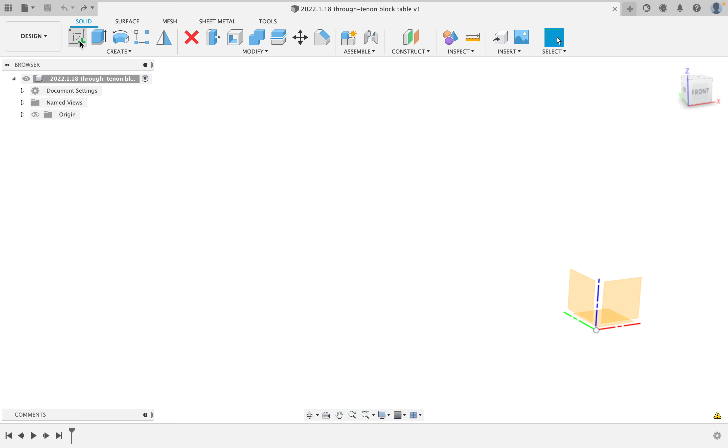This is the third installment in our Through-Tenon and curve-inspired classes for today, and we're going to get started by modeling this coffee table based on an idea that one of our subscribers and students talked to us about, and we are going to start modeling on the front.

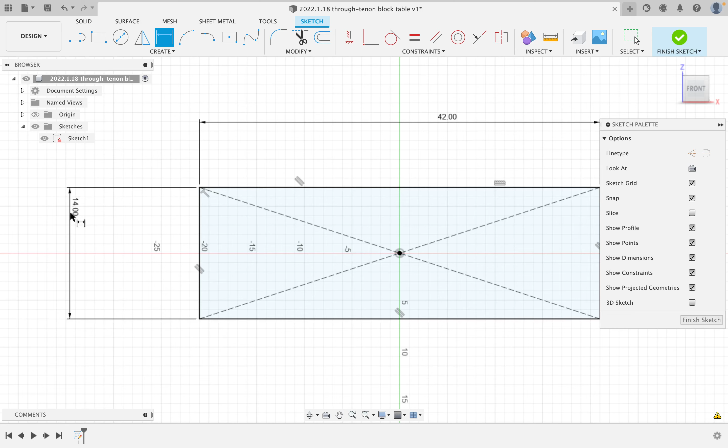We'll create a center point rectangle and just drag it out. Click on the dimension tool and set the top dimension to 42 inches. We're going to make the table exactly 14 inches tall, which gives us a nice dimension for a coffee table. If I double click on it and hit X, that changes these to guidelines, so they're not the actual outsides of the table itself.

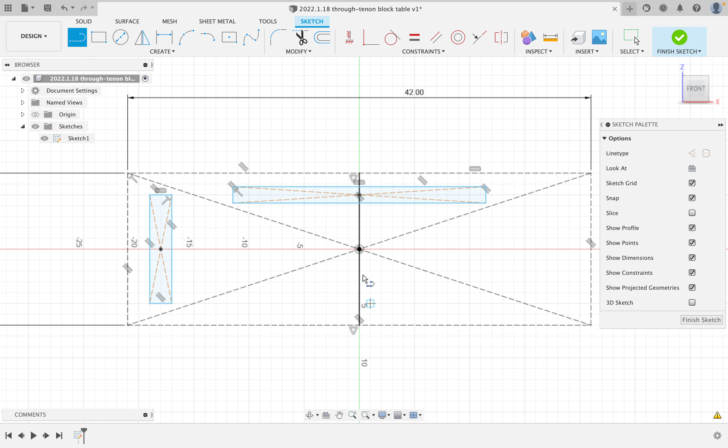I will click on the center point rectangle and create another rectangle, one for the legs and one for the top. We're going to model one leg, then copy it across after we do the joinery. Now we're going to need some mirroring lines, a mirror line through one and the other, so that we know we get things exactly in the center. I will change each of those to guidelines by hitting X.

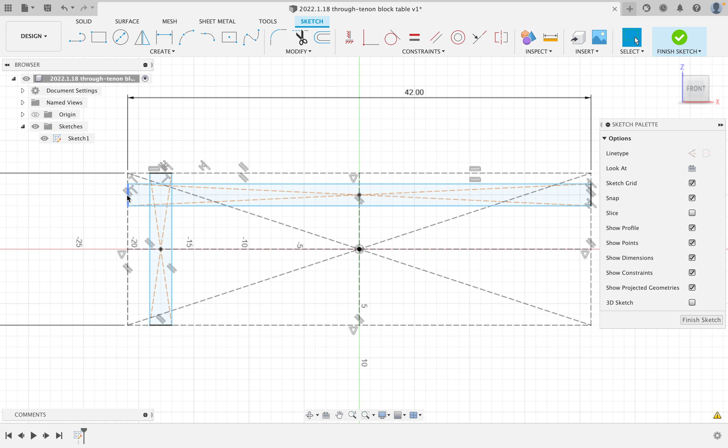And we are going to make these the exact width. I will click on this outside line and say it matches up with this outside line, and make the inside center on the center line here. I'm going to do the same thing with the inside center of that, and take the outside line and make it collinear with the outside. So now we have exactly those pieces.

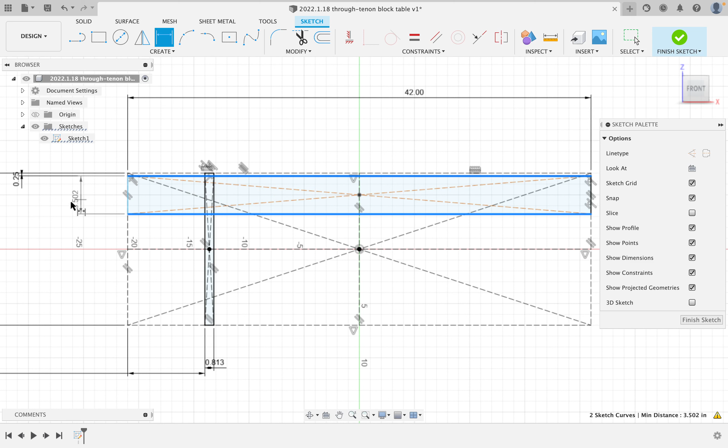The only thing I need to do now is tell it how far in and how far over each piece is going to be. So I will dimension from the top that it is going to be exactly 1/4 of an inch down. I'm going to tell it that the inside leg is going to be 7 inches in. I will tell it that the leg is going to be 13/16, and that the top is going to be 15/16. I think that's going to work out quite nicely.

No, we'll make them equal. We'll make them equal, and it will make our modeling a bit simpler. You can always change them back after if you like, but I think it'll make it easier to understand.

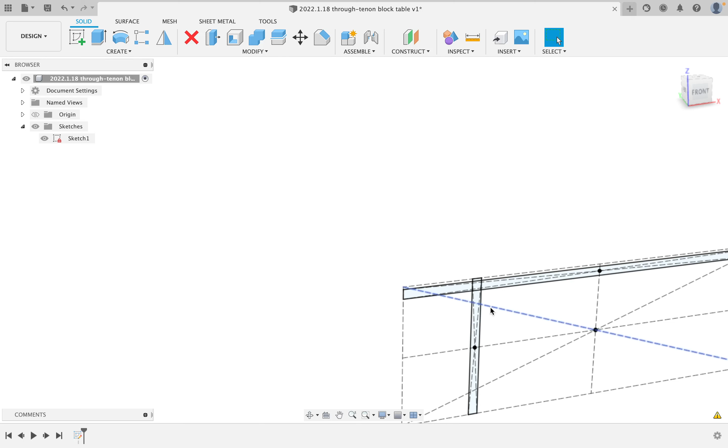Now, what I'm going to do is say Finish Sketch, and I am going to extrude the top. Pick the 3 pieces of the top, say New Component. I'm going to make it symmetrical, and the top is going to be 14 inches wide, so that's 7 inches in each direction, and hit OK.

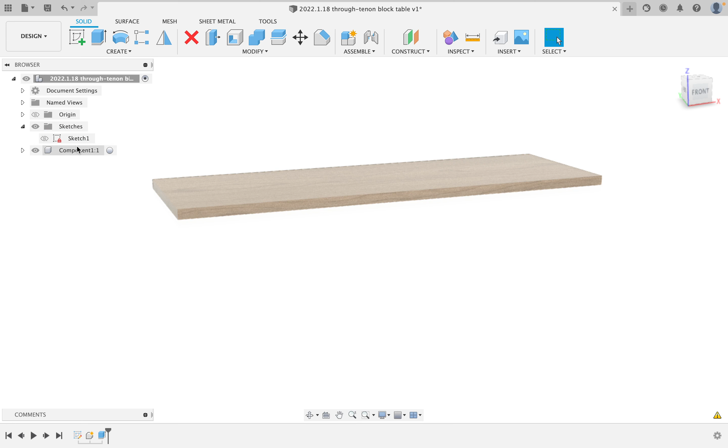To avoid any confusion, we'll rename it to be Top, turn our sketch back on, hide the top, and we're going to make our leg. We'll pick the 3 pieces of our leg, say New Component.

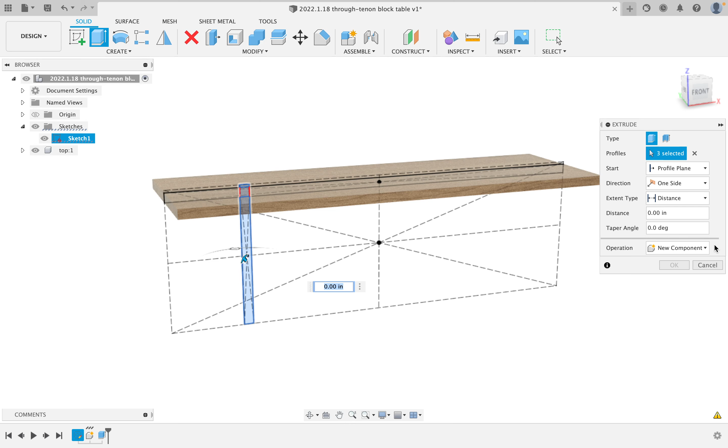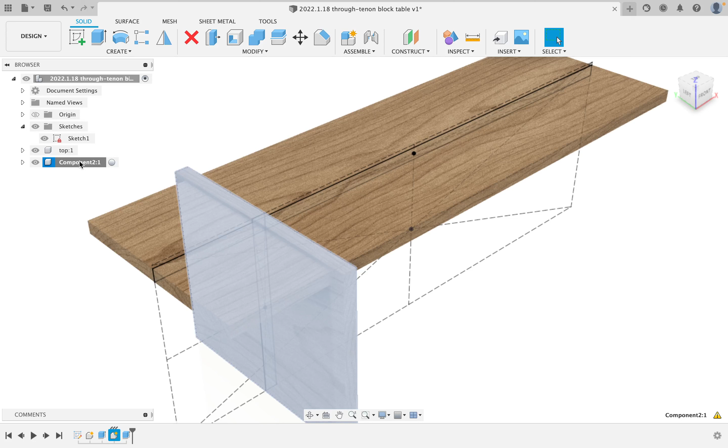We are going to actually make this leg wider than our top. So we're going to start from one side, go to the other side by selecting To Object and picking it, but we're going to make it 1 inch wider by changing our offsets to be 1 inch. Our new component, hit OK, and we will rename that to be legs.

When we turn off our sketch, we now see that we have one piece going directly through the other piece. Now, I think that's an interesting look, and we could actually just cut a hole, and that would be a neat way of mounting the table. But we're going to make something that is a little more intricate and involved here today.

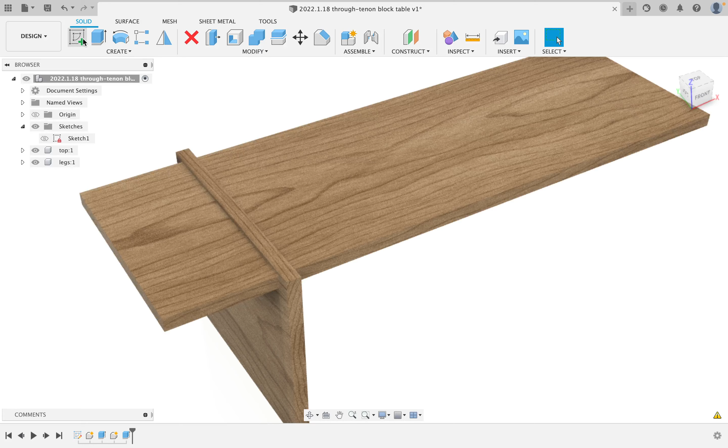So what I'm going to do is cut out some tenons. I will click, and I will start modeling on the top of our leg. Now, I want these tenons to start in the center, and that means I need to find the center line. So I will draw a line from the top to the bottom.

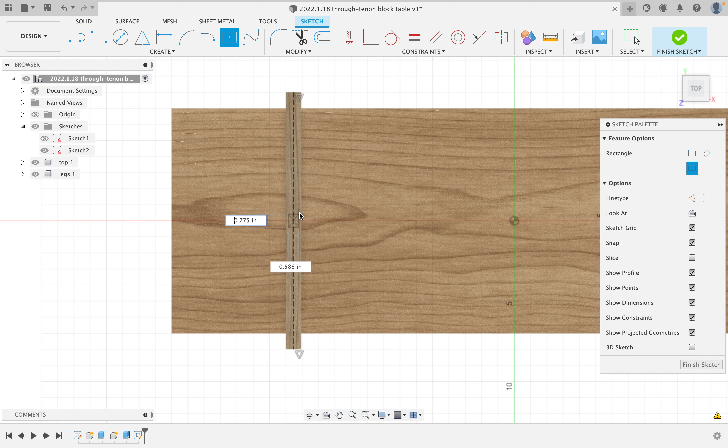This little triangle means the midpoint, and if I click on the line and hit X, it becomes the center. So I'm going to draw a center square. It's going to be a center rectangle first, but then I hit equals and click on both.

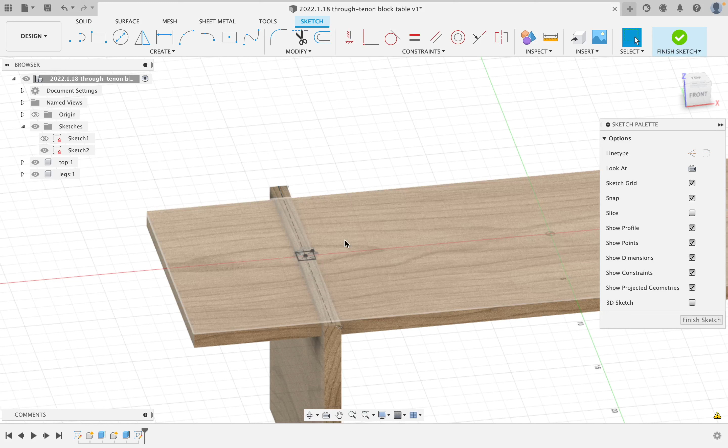Now that it's linked into the sides, it already knows it will be exactly the size of the piece. I want a bunch of these evenly spaced so I get through-tenons in that piece. So I'll create a rectangular pattern, pick this center rectangle, all four sides by double clicking, and pick the direction I want it to go. I want it to go in both directions, so we'll say symmetric, and create a quantity of 3, 4, 5, 6, 7.

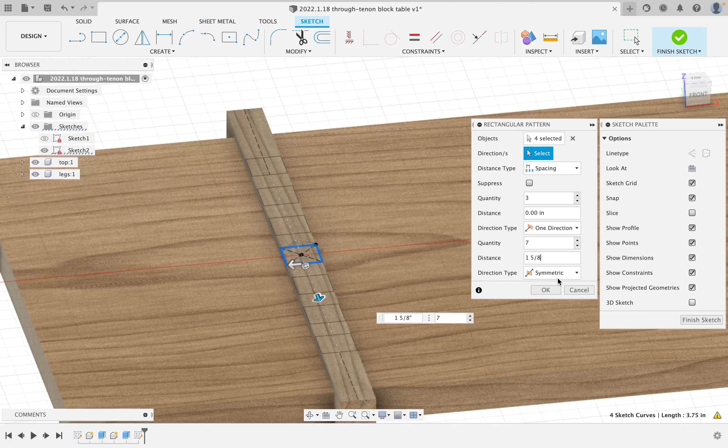I'm going to make the spacing slightly less, 1 and 5/8. Still not quite big enough. Let's change this to 1 and 7/8. We'll flip up and look at this on top so you can see where the spacing is going to be. 1 and 7/8 is looking just about right. You can always do this by eye and come back and change it later, but I think 1 and 7/8 is good. What I'm going to do now is say finish sketch.

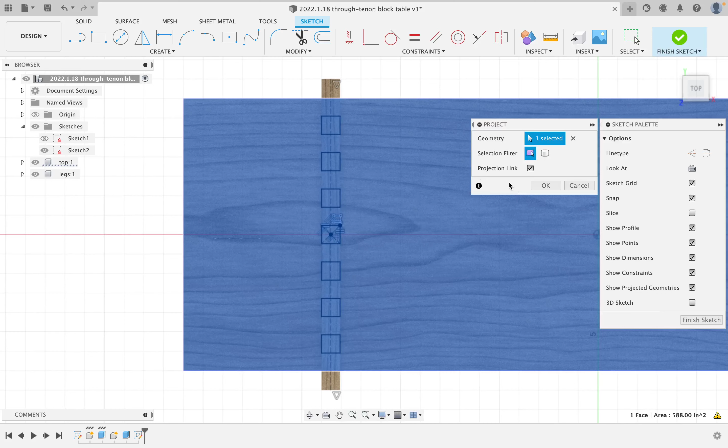Wait a second, I need one more line. I'm going to hit P for project, and project the outside line of the top onto it. Projecting just copies a dimension and a line from some other drawing. So we have the edges, and now we also have the outside lines.

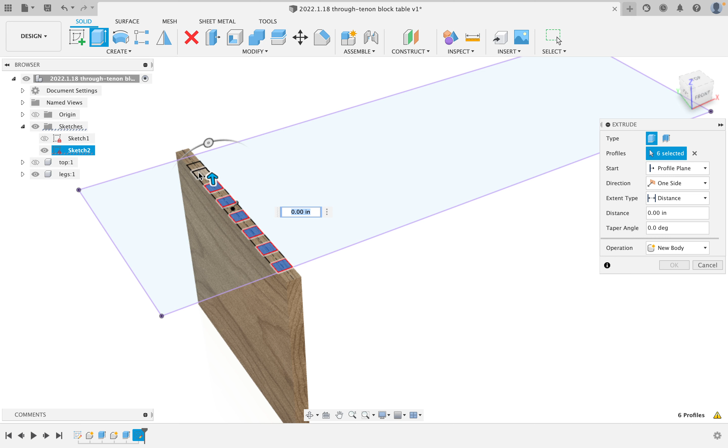If I say finish sketch, I should be able to click on this extrude button. I'll turn off the top, and pick all the spaces where we don't want a tenon to be. I'll say cut to object, turn our top back on, find the bottom, and turn the top back off. When you're cutting holes, you really only want the thing visible that you're cutting into, because it can get confusing. You can pick them manually in objects to cut down here, but it's easier to just turn them off so they won't be cut.

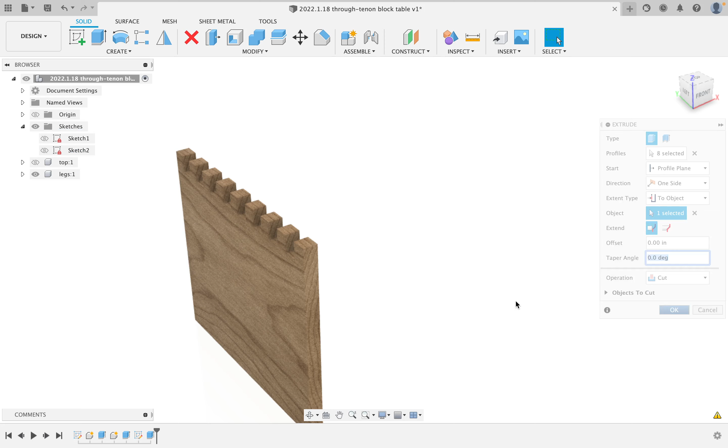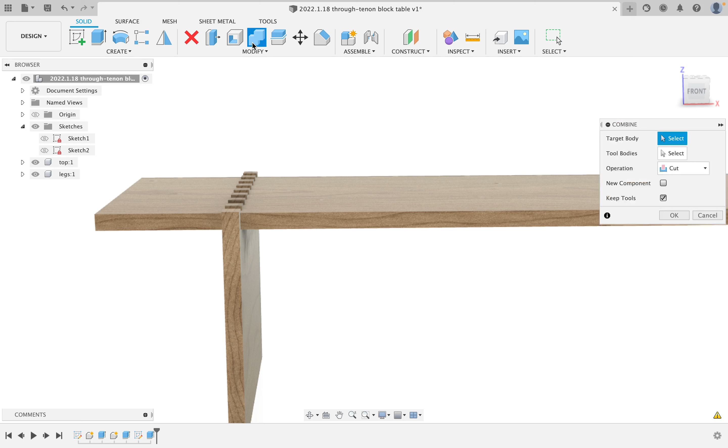So we now have a bunch of through-tenons, square through-tenons, which is a very classic Japanese look. If we turn the top on, we can see these through-tenons, but we don't have actual holes for them yet. I think they come up a little high, but we can fix that in a second. So if I click on this combine tool and cut the top with the bottom and the leg, and hit OK, I can now turn off the leg and I have holes going all the way through the top.

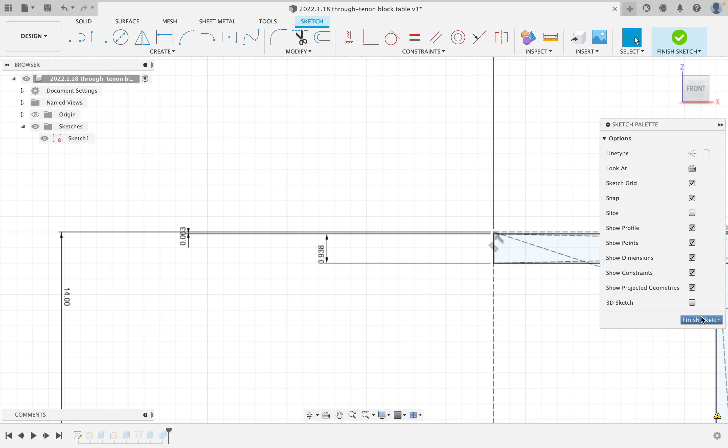Now I think that's an interesting look, but I think it's too far. Some people will like it and others won't, but I do not. So we'll edit the sketch, and I'm going to make them only proud by 1/16 of an inch, then hit finish sketch. I think that's far more subtle, and more the look we're going for here.

Now what I want to do is copy that same set of holes over to the other side. I could mirror this and cut another set of holes, but I'm going to show you a different technique, because we've done that mirroring and cutting technique before quite a few times.

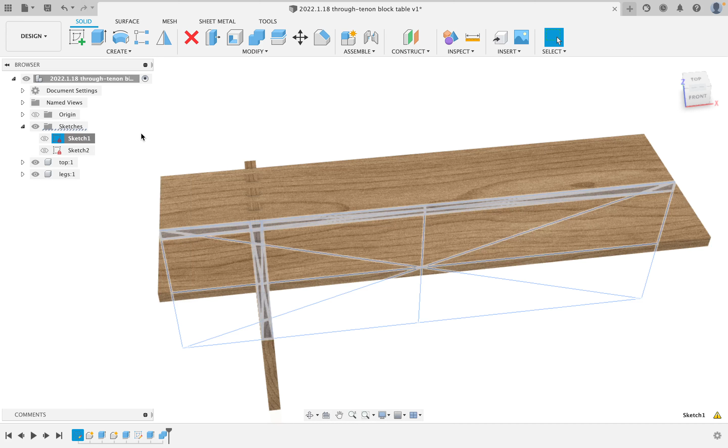So if I go into the first sketch, you see the center line that we drew as a guide. I'm going to click on it and hit X to toggle it back to a regular center line. Now I see where I extruded the top. I'll right-click, hit Edit Feature, and turn off the right-hand side.

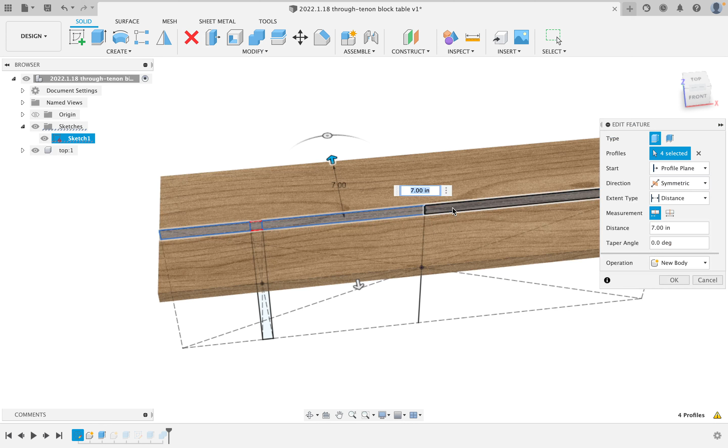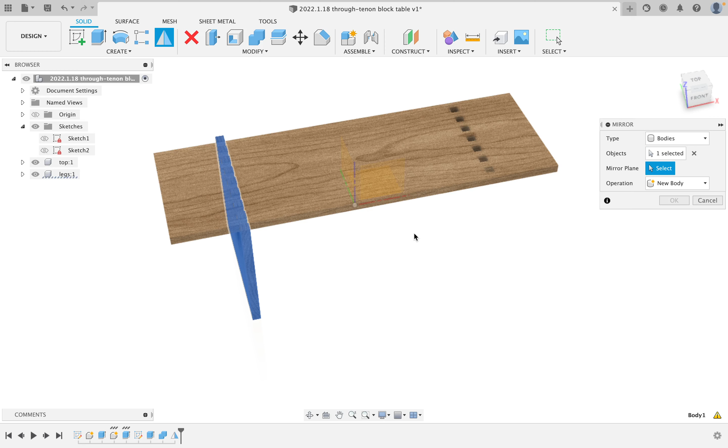Now, if instead of doing that, I mirror the body across the center line and tell it to join, it now is a mirror image, and the holes are exactly in the right place. If I again mirror a body across the center line, I can mirror the leg, and we now have the leg for our coffee table on the other side.

Now the only other thing that we want to do here today is create a little brace for this. I think it is actually looking a little blocky, but we'll deal with that in a second. We'll see how it looks once we actually put in the block on the bottom.

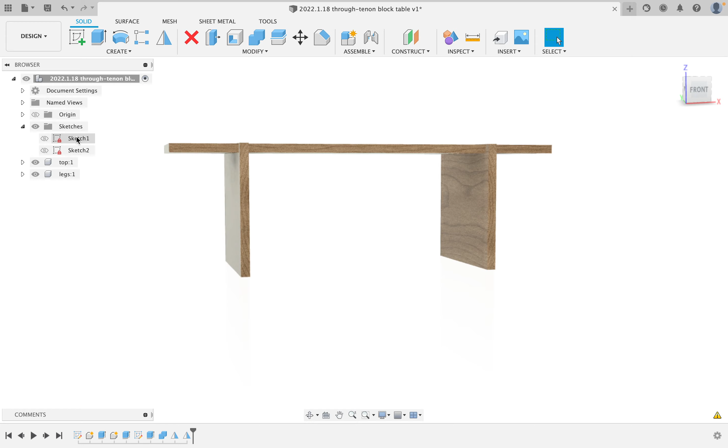If we go back into our first sketch, what I'm going to do is add a typical Japanese style mid-century accent on the bottom. I'm going to draw an angle, and I'm going to draw another angle and a straight line. I will connect this in to the bottom piece by clicking across, drawing another angle up and over.

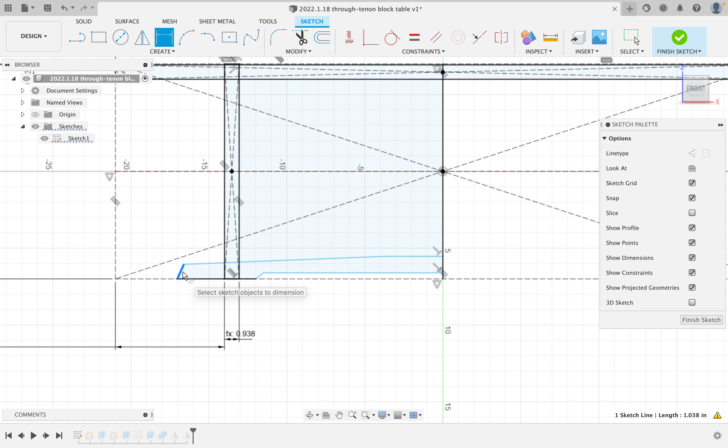Now I've only drawn the outside edge. I will hit dimension, and I will pick these two lines and tell it that it is going to be a 67-degree angle. I'm going to tell it that this other angle here is going to be exactly 115 degrees. I will scroll in and tell it that this angle is parallel to the outside angle, and that this foot is going to be 5 inches.

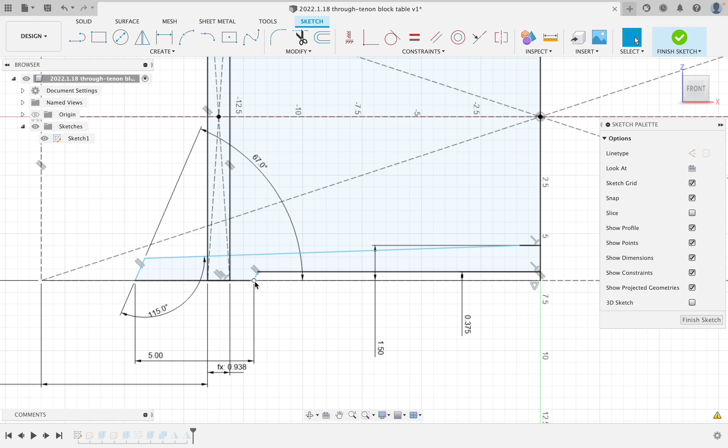I will tell it that the inside dimension is going to be 1.5 inches, that the inset will be 3/8 of an inch from the bottom. And if you do this, you can go in and drag the lines and see where they actually meet up, to see what can move.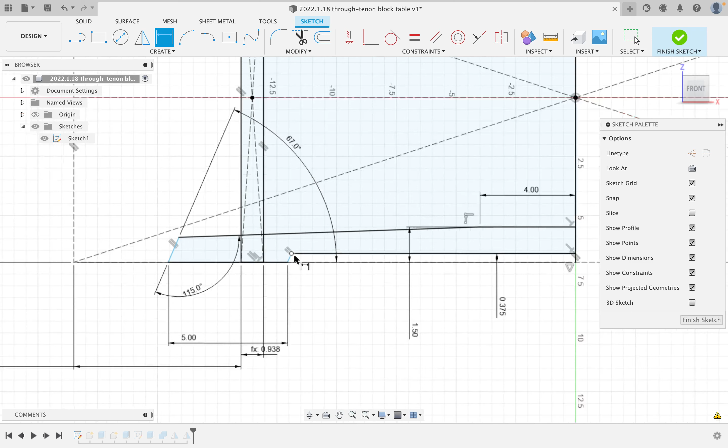So I want the line here to end exactly 4 inches from the middle. And this piece here, this is telling us how far out the whole thing is. So I want the outside of our foot to be inside the middle of the table by 4 inches. And that will give us our nice little foot.

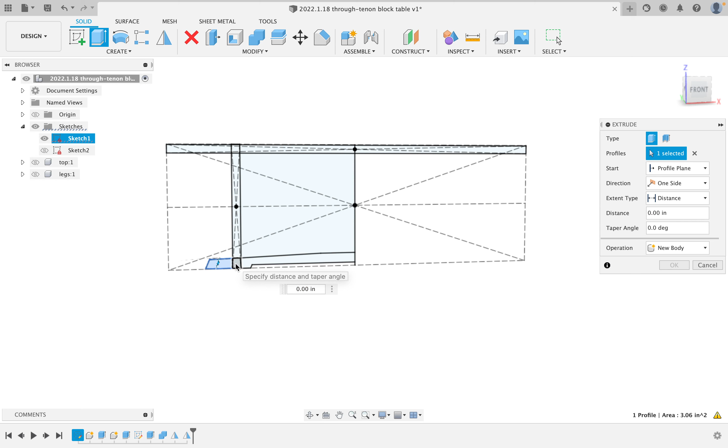So we can say finish sketch. If we turn off the top and the legs and turn on our first sketch again, I can go in and say I want to extrude this bottom piece. We will again make it symmetrical around the center, and we're going to make that exactly 5/8 of an inch thick. We'll create a new component and say OK.

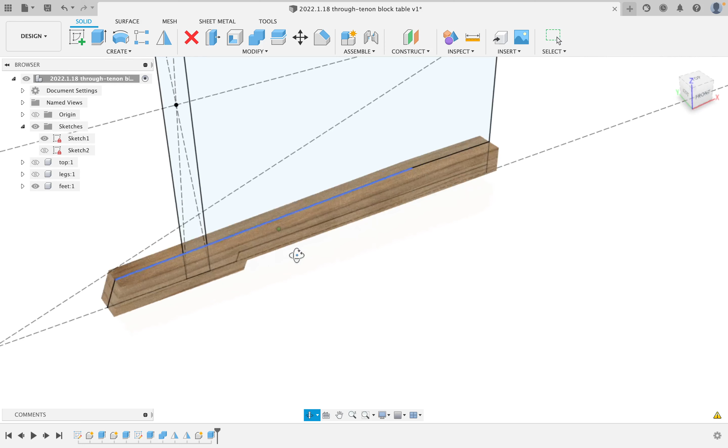And we'll call this feet. What I'm going to do is turn the sketch off, tell it to mirror, and mirror that foot through the center, so it goes the whole way, and I will say join. So we have this nice classic mid-century foot that is going to brace the whole thing.

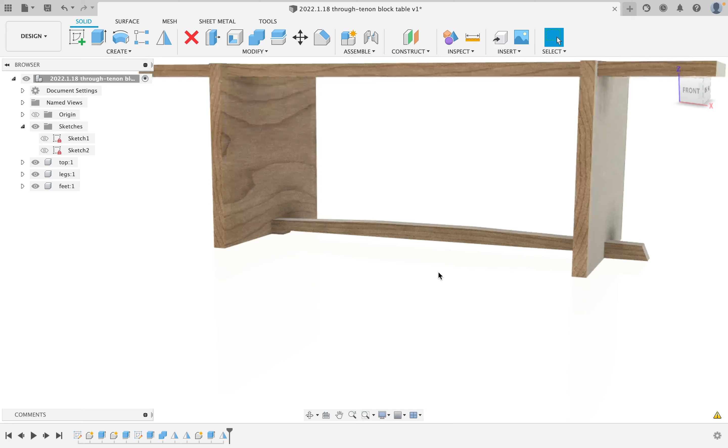If I turn the top and the legs back on, you can now see exactly what we have created here. And we have this nice little mid-century detail. Now, there are several ways that this can be accomplished, and they can look a little different. I think that that piece is a little small for the size of our table in terms of its height.

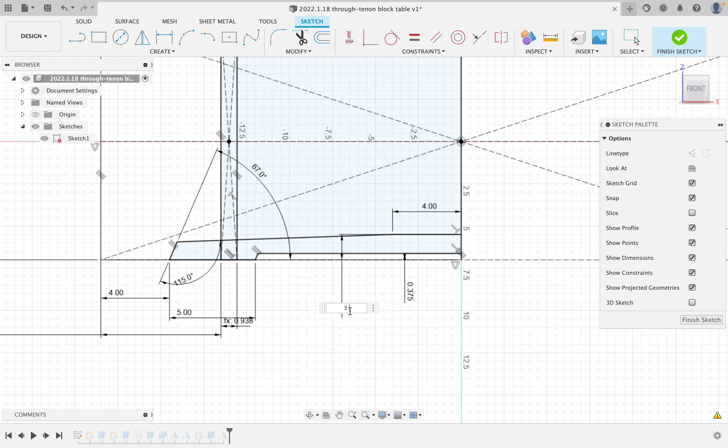So we will go back in, and I will show you just how easy it is to correct that. I think that we need to make this significantly taller. I think we will double that up and make it 3 3/8 inch tall. We will hit Finish Sketch, and now we have a much, much blockier brace.

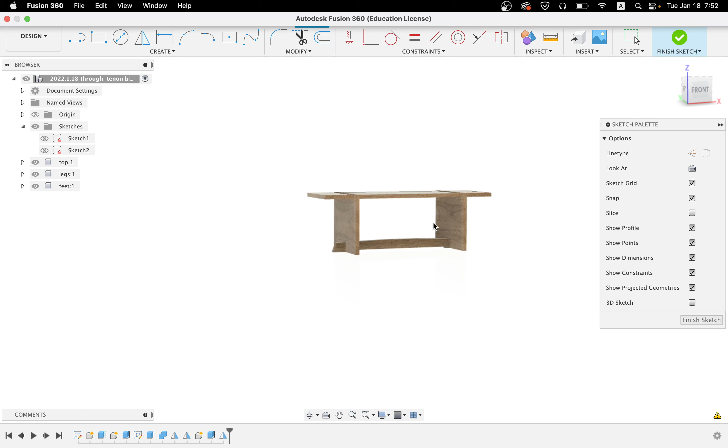That might be a little big, so again, we will go in and through the magic of trial and error, we will call this 2 5/8, and that should work out to be just right. We'll call this Goldilocks modeling. And I think that works out to be quite a nice little accent piece for the table.

I think the table itself is a little blocky, and I think it should be longer for what we are doing. Of course, that will somewhat depend on the dimensions of your room, but we're going to call this 52 inches long, and hit OK. And now I think it looks much, much more like the style of table that we were aiming for.

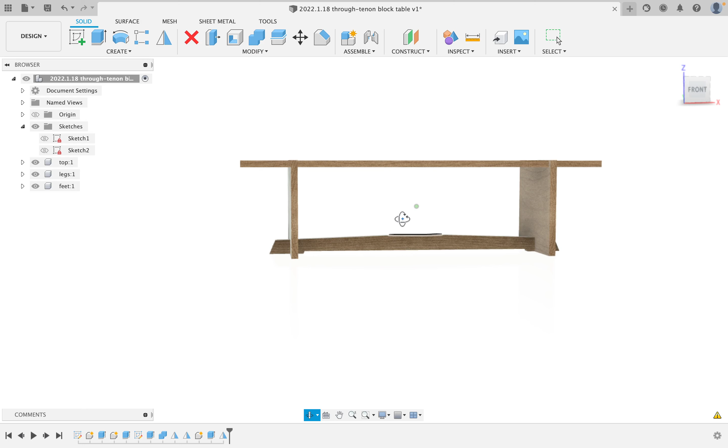On the inside, I think we have made a slight error in terms of having that sketch actually angled. I don't like the angle, so I'm going to change that. And even after modeling those pieces, I can go in here and I can draw this as just a straight line.

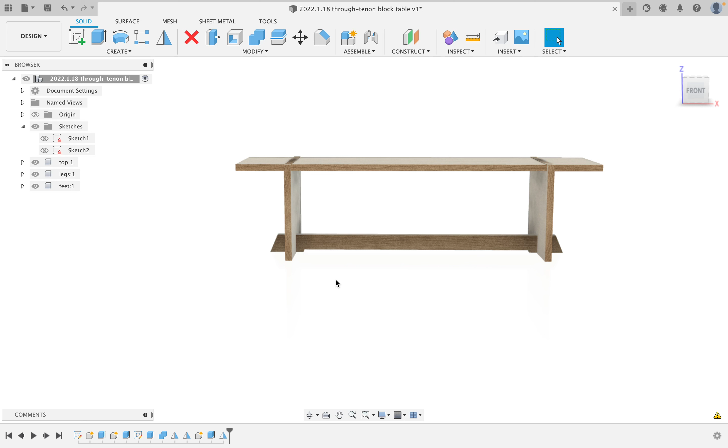I am going to tell it that that line is exactly 2 5/8 inches up from the bottom, and hit Finish Sketch. Now you can see I have totally reshaped that piece, but it has still kept it in the model exactly as it needed to be.

So there we have it. We have a nice little coffee table, which I think works out quite well. The only thing that we might need is a second brace, so let's go in and take a look at that.

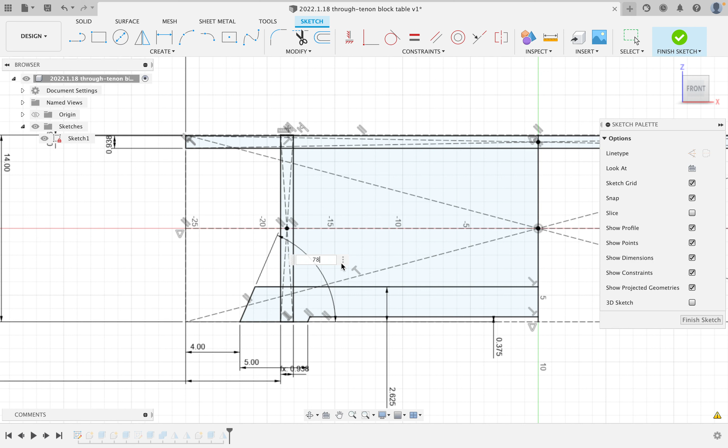We're going to say Edit Sketch. While I'm at it, I'm going to change this to be 78 degrees because I think it will match up more nicely. I am going to draw again up here, the same shape, down and over. We don't need to make this little cutout because this is going to be a brace piece.

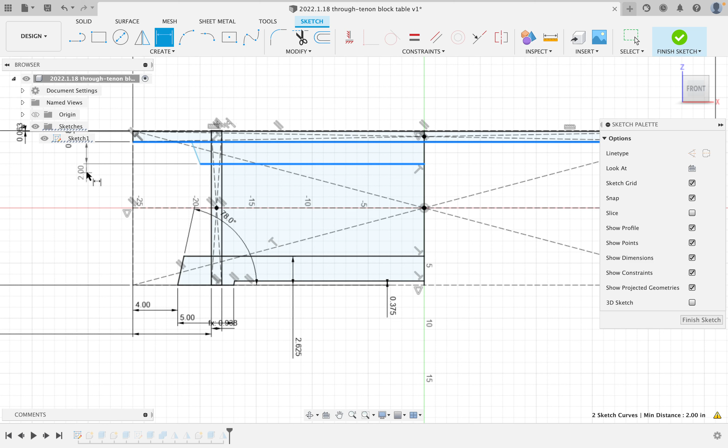I am going to change the dimension, so this is exactly 1 inch down. I am going to make this angle match that angle. I'm going to draw the angle in the right direction so that I can copy it. I'm going to make this angle from this line to this line the same as this angle here.

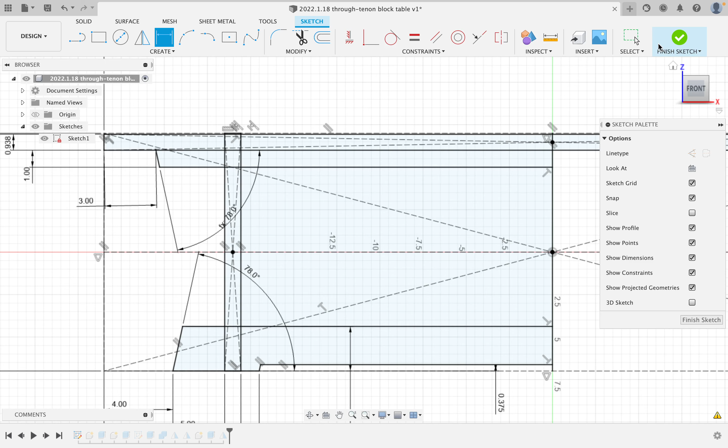And I will tell it that from the outside to that piece is going to be 3 inches, and I will say Finish Sketch. Now, if I turn those 3 off again, turn on our sketch, and extrude - we've done this before - I'm going to extrude that exactly 1/2 inch in both directions.

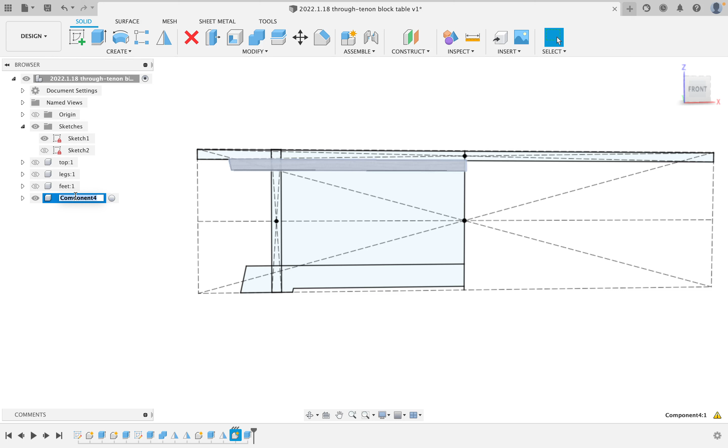New component, we'll call this brace. We'll turn off our sketch and mirror it across the center line. Hit OK. And we'll turn on our other pieces. We now have a nicely braced coffee table component.

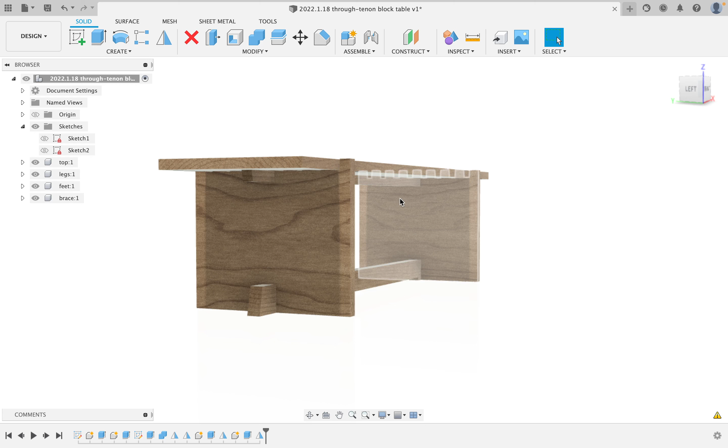Now, of course, we need to cut some of these pieces out. We are going to just use basic holes. We could do some half laps on these. For the top one, I will show you how to do it the basic way.

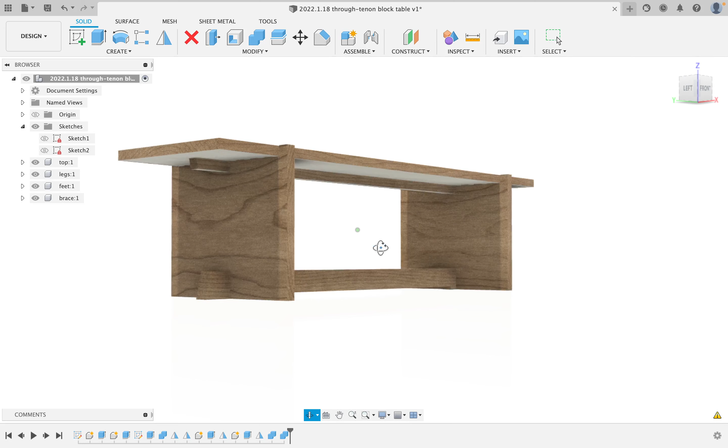Combine, left piece and brace. OK. We will repeat, right piece and brace. OK. Now on the bottom one, I think what I'm going to do is cut in some half laps.

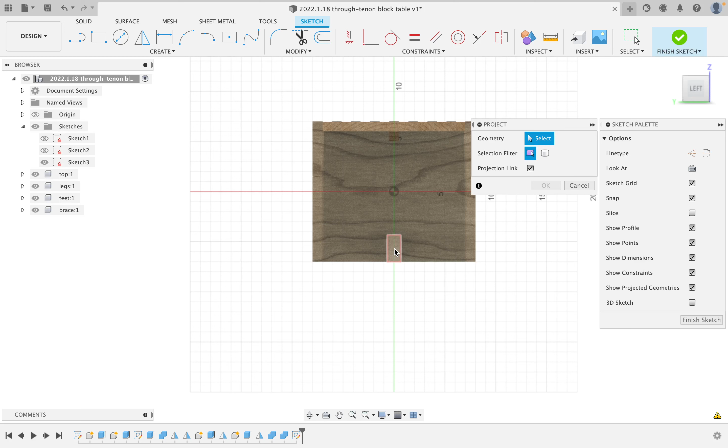So I want to be able to cut half this into these legs. So what we will do is we will cut a hole into the leg that is half the height of this. So if I do a new sketch on the side of this leg, I hit P for project, copy the end, and hit OK. I can now click and draw a line directly through from one midpoint to the other, and I have now divided this in half.

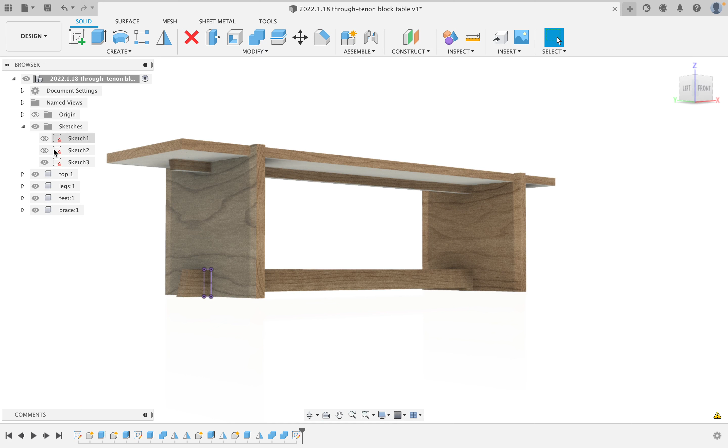What I want to do is hit Finish Sketch. I will turn off the brace and the feet, and I am going to click Extrude this bottom half to the outside of the other leg. To Object, outside of the other leg, and hit OK. I have now cut the bottom half of my half lap.

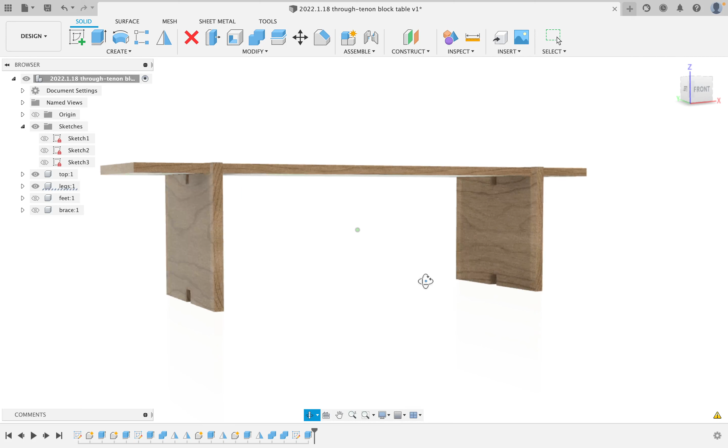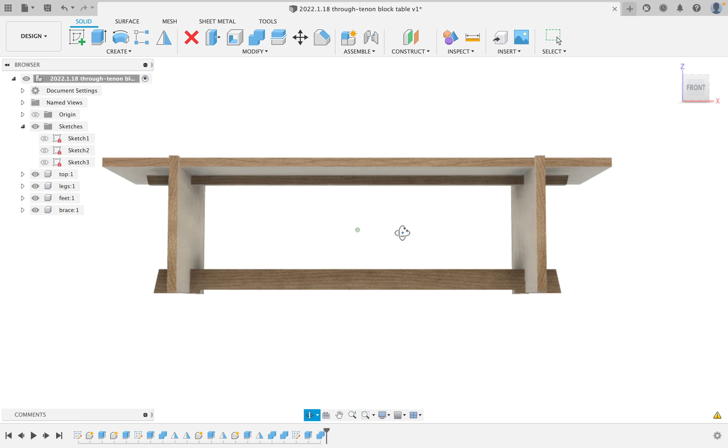If I turn back on the feet, and I cut the foot with the 2 sides, if I now turn off those legs, I have now cut the bottom half of my half lap. So those will now slot in exactly the way I expect them to, and I think that works out quite well.

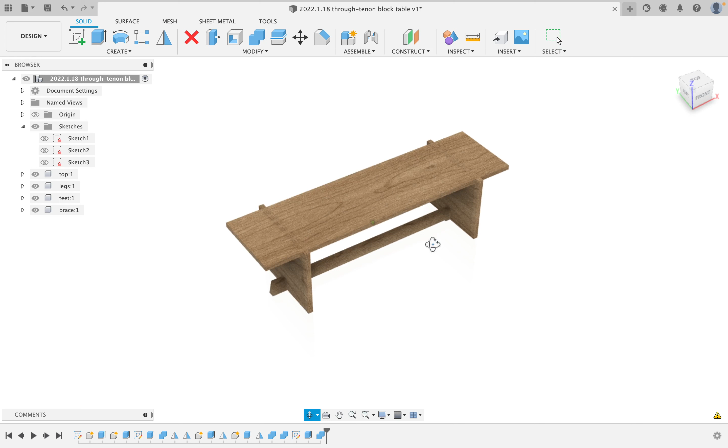All you have to do now is make sure you get those in place. You wouldn't have to use any other bracing to get that top in line, it will just sit there. You could put some dowels in, but realistically gluing it to those legs is going to be perfectly fine. People are going to ask things about wood movement, but because the grain of the top and the grain of the sides is all going to be running in the same direction, that works out to be fine.

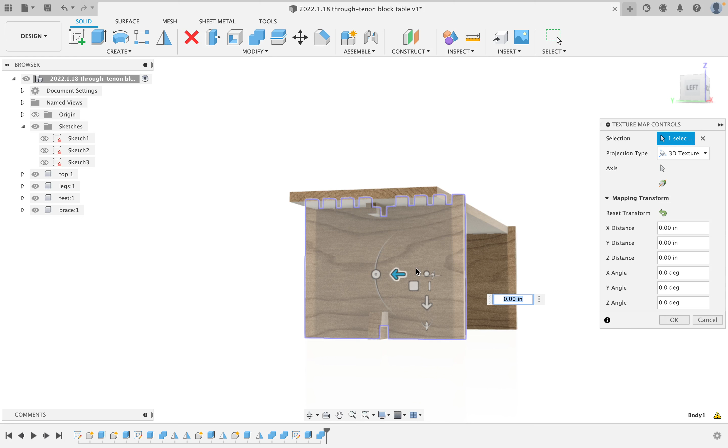You'll see in these models, though, it is not. So if you want to model it and be accurate, we will right-click on one and say Texture Map Controls, and rotate it so the grain direction is straight up and down. I'll go over to the other one, and for the sake of making appearances look good, which might be useful if you were going to show this to your client before building it, we will change our grain direction. So when you build it, it's not going to look like a waterfall table, but this is the right idea.

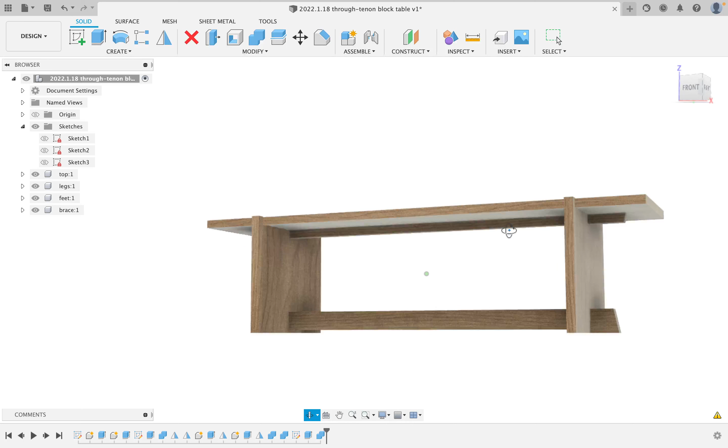Now these pieces, the grain is running along the piece, and yes, that will be a cross-grain connection there, but you don't need to worry about it because that piece is so small it won't have much seasonal movement. All the seasonal movement here is going across the grain in the same direction, so the piece will not crack apart.

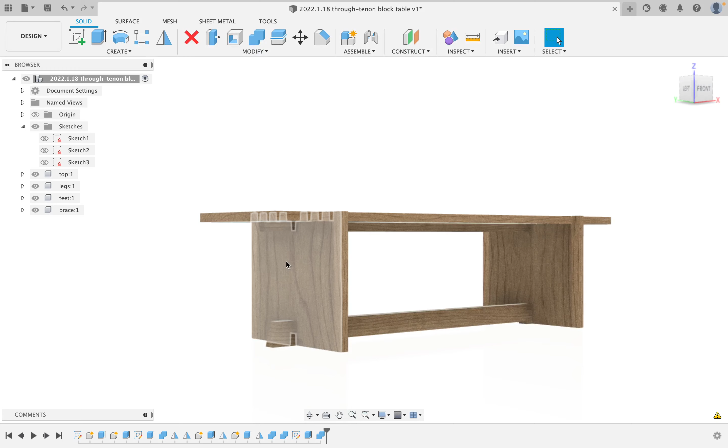I think that looks quite good. There is one other change we could make to feel slightly more modern. If we hit A for appearance, I'll show this modeled in maple and walnut. We already have it in maple, but if I added a few walnut accents, I could add a walnut accent—whoops, not to the brace. I want the whole thing to be glossy maple.

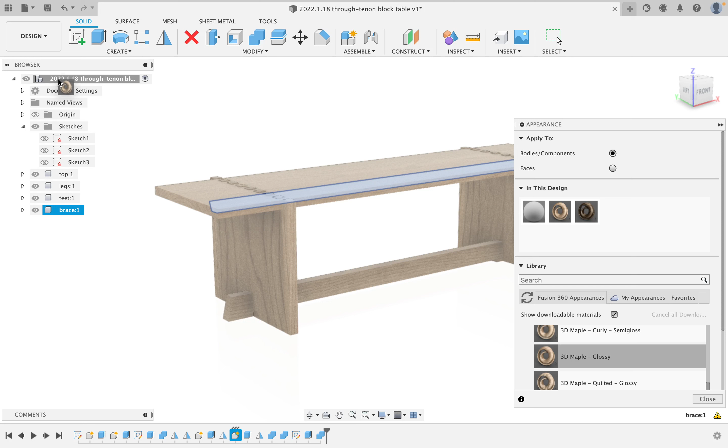We will remove any changes made to the maple, and I'm going to make the top and the legs from walnut, and hit OK. Now we have maple accents and a beautiful mid-century modern coffee table.

This could also work as a bench. Either way would be fine—it would be great for either.

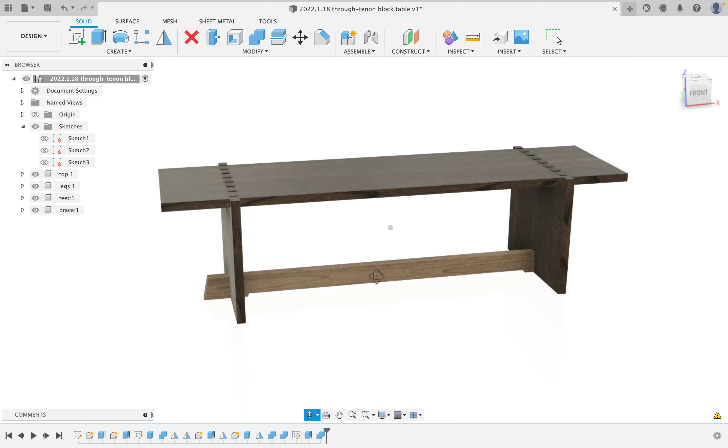In case you're curious why we were doing this today, there was a student asking about modeling this for their house. They have a mid-century Japanese style combined fusion furniture, and they wanted to see how to create a basic model for this kind of thing.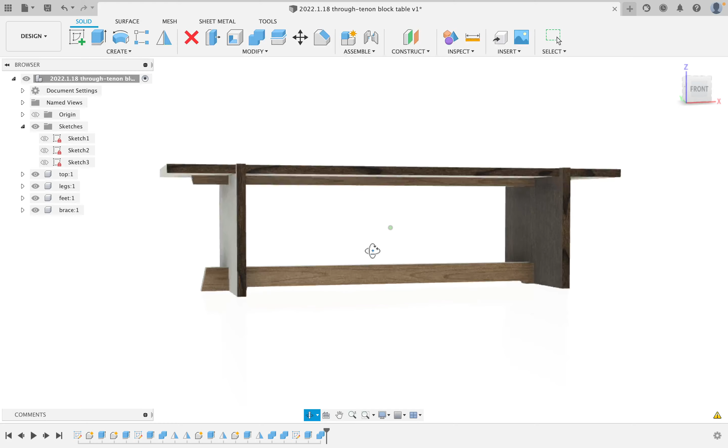I don't know exactly the dimensions they have for their room, but they could easily take this model, and if any of you want copies of the models we're doing in these classes, just feel free to ask and I will happily provide them.

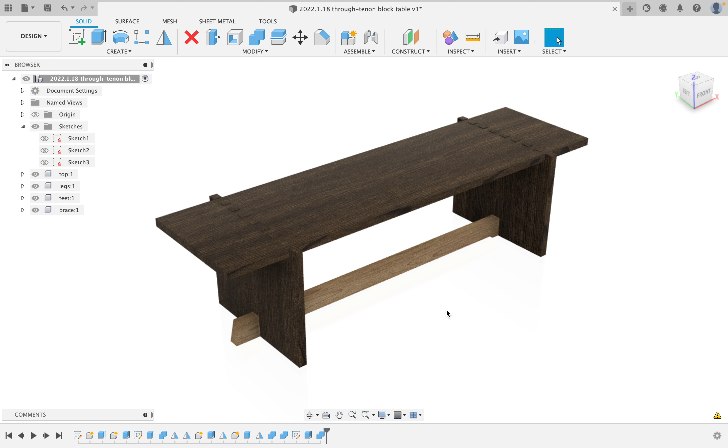I think that worked out quite well. There's one other thing we could do, which is quite common in mid-century aesthetics. Often we'll take things like the three-dimensional walnut and make the legs darker than the top, so the legs come through as a slightly different color. We're going to apply a different stain.

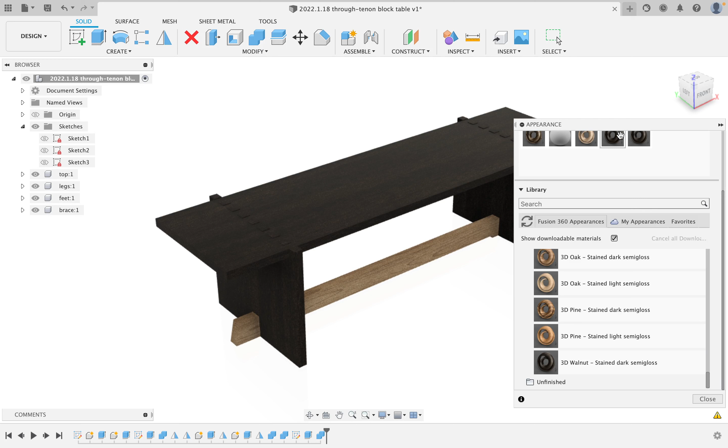If we right-click and hit duplicate, we'll apply this other stain to the legs. It's the same at the moment, but we're going to make the legs slightly darker by changing the color—slightly darker, and making the grain pop a little more in those pieces.

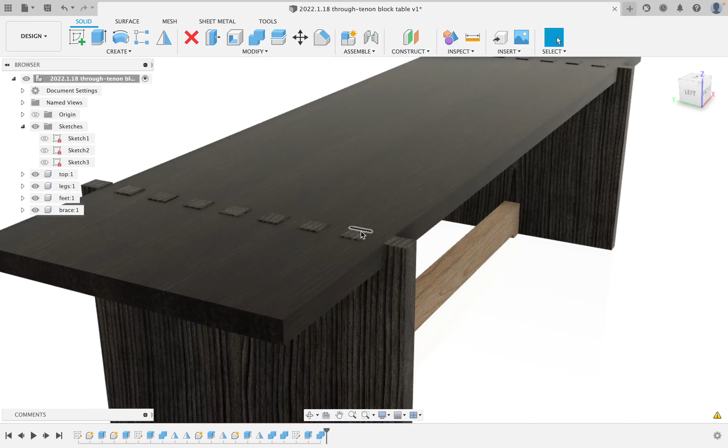So if we close this, we can now see we have two different stains—a dark stain and a light stain going through these pieces. We'll make it slightly more subtle by using the darker of the two stains on our feet and the lighter on our brace.

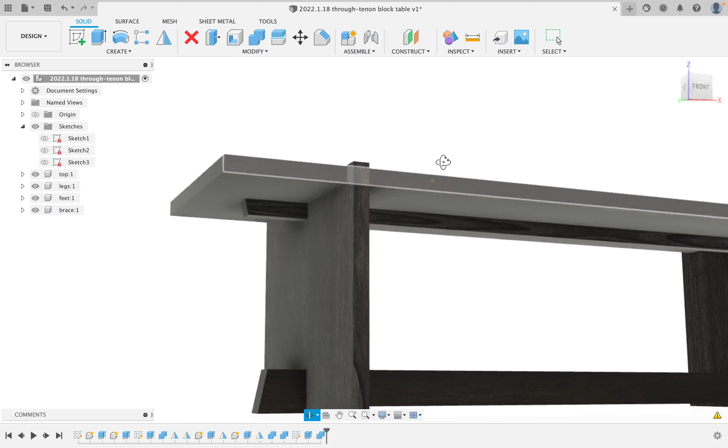Now the whole thing is in walnut with a stain, and it's a very subtle piece with some nice details of these through-tenons that you wouldn't necessarily see until you got quite up close to it. I think that's quite nice.

So that is the third of our live streams for this section. We started with a monitor stand that was organic and curved. We then went on to a monitor stand that had through proud dovetails, which inspired this design here with through Japanese-style square tenons.